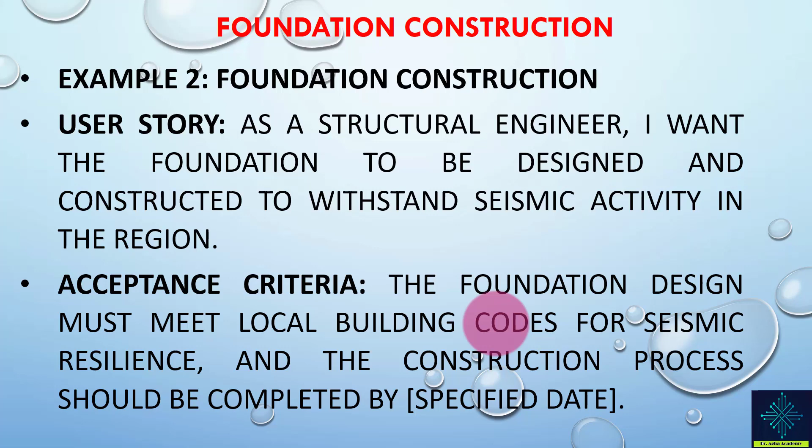Another example related to structural or civil work: foundation construction. Our user story: as a structural engineer, I want the foundation to be designed and constructed to withstand seismic activity in the region. The acceptance criteria is that the foundation design must meet local building codes for seismic resilience, and the construction process should be completed by a set date. The codes can be defined by the project manager and project team, but they must take into consideration the regulations the organization, government, or country where the project is taking place imposes.

Then MEP system installation, related to the MEP part of the project. Our user story is narrated by the MEP contractor: as an MEP contractor, I want the mechanical, electrical, and plumbing systems to be installed with minimal disruption to other construction activities. We all know these activities usually cause a lot of disruption to other activities, and also get disrupted by them, so we have to take care of this issue. The acceptance criteria is that MEP systems should be installed according to the approved plans with regular updates provided to the project team, and any issues causing disruption should be promptly addressed.

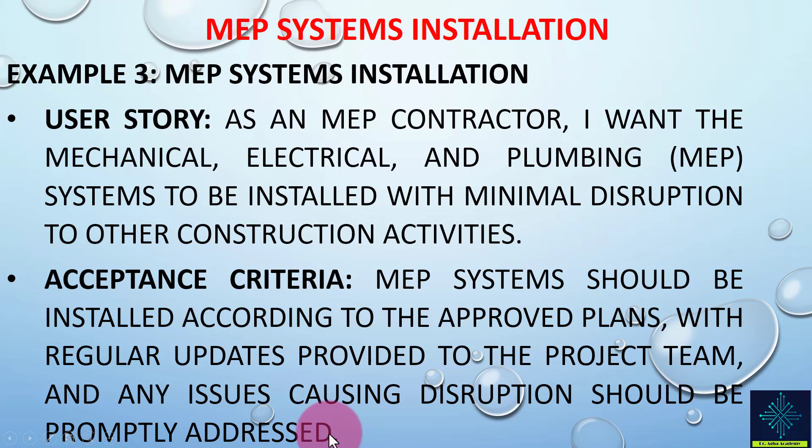Another example related to quality assurance, for concrete work. The story: as a quality assurance inspector, I want the concrete work to meet specified strength and durability standards. The acceptance criteria is to conduct regular testing on concrete samples, ensuring that the mix design aligns with the project requirements and that the concrete achieves the specified compressive strength, as per design or other requirements.

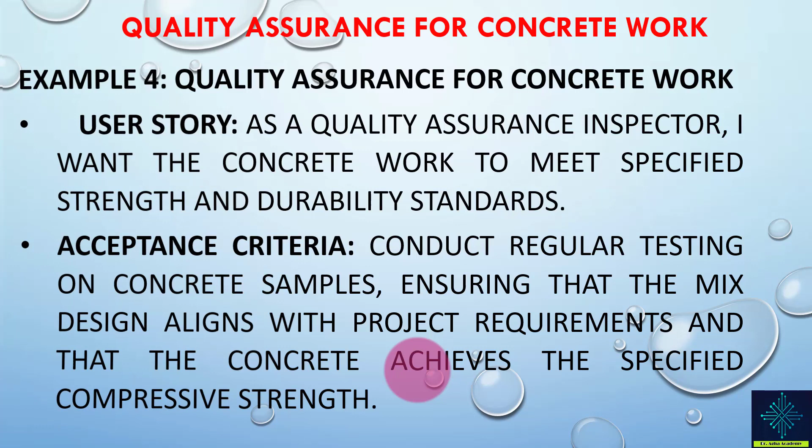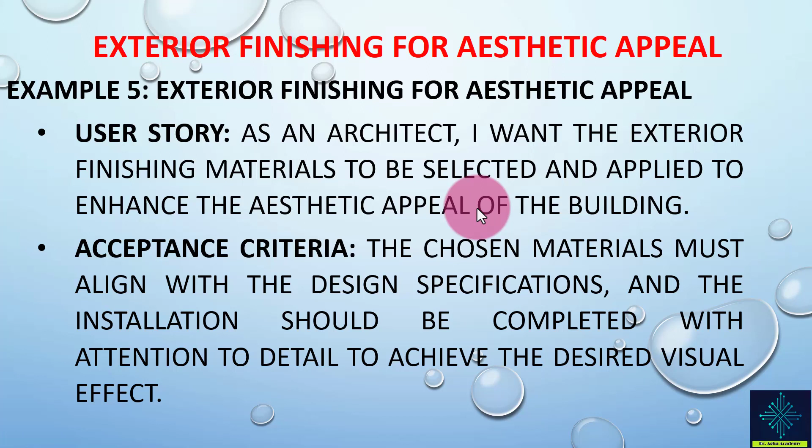Then something related to architectural work: exterior finishing for aesthetic appeal. Our user story: as an architect, I want the exterior finishing materials to be selected and applied to enhance the aesthetic appeal of the building. The acceptance criteria is that the chosen materials must align with the design specifications, and the installation should be completed with attention to detail to achieve the desired visual effect. Especially when it comes to facades, architects do care about the appeal and appearance.

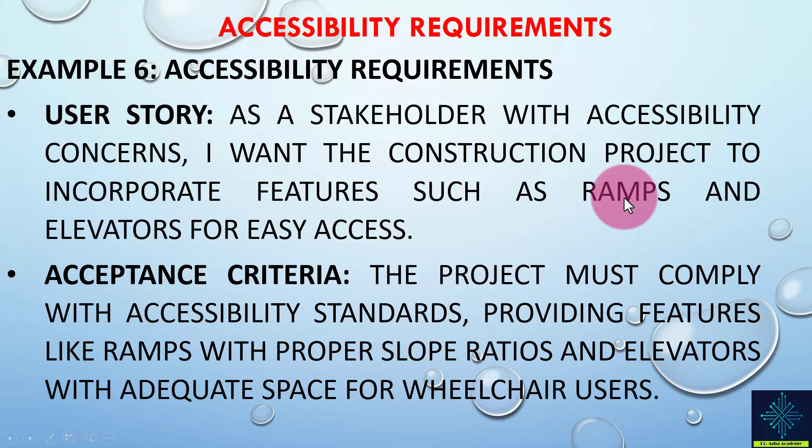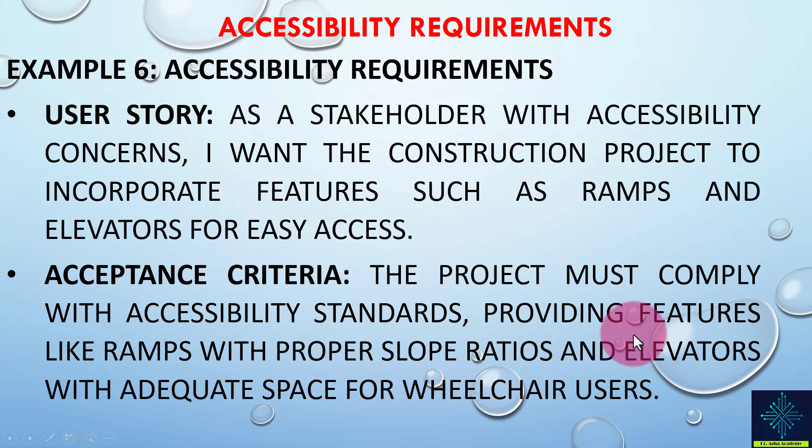Then accessibility requirements. The story: as a stakeholder with accessibility concerns, I want the construction project to incorporate features such as ramps and elevators for easy access. Ramps and elevators are sometimes a serious issue - if not designed properly, we will find difficulty accessing different parts of the project, or even safety issues might arise from slipping, and the same holds for elevators to a great extent. The acceptance criteria is that the project must comply with accessibility standards, providing ramps with a proper slope ratio and elevators with adequate space for wheelchair users. This is very important for safety and accessibility.

Then the issue of site safety arises, which is very important. We have a user story related to site safety measures: as a safety officer, I want the construction site to implement safety measures to prevent accidents and ensure the well-being of workers. The acceptance criteria is that regular safety briefings, proper signage, and the use of personal protective equipment should be enforced, and any identified hazards should be promptly addressed, so as not to turn them into risks and mitigate the risk for the project. This is a very important story and acceptance criteria related to stakeholders.

In conclusion, these user stories help capture specific stakeholder needs, providing a basis for communication, collaboration, and iterative development in the construction project. They also contribute to a shared understanding of project goals and allow flexibility in adapting to evolving requirements. Of course, these are limited examples - you can build on them, and have as many as you require depending on the project type, complexity, and stakeholder requirements.